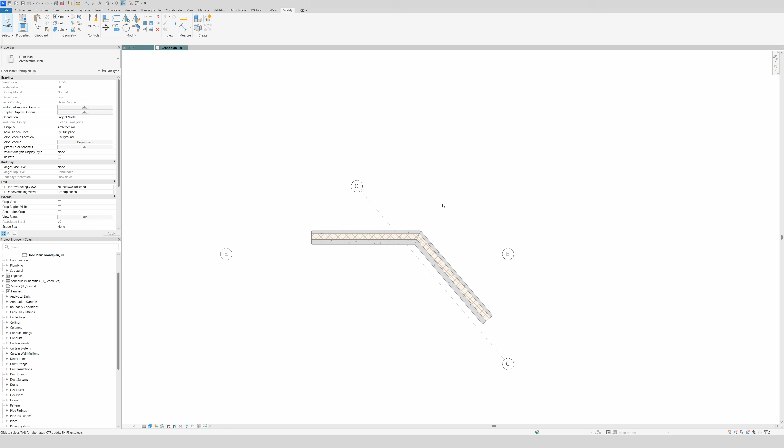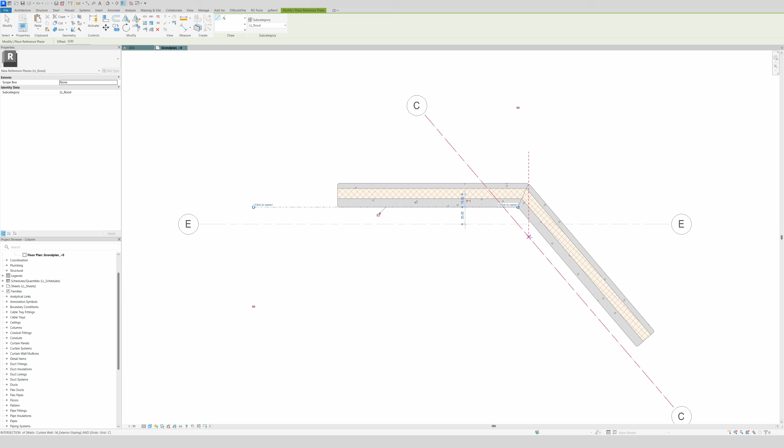Well, how do we get started? As you see here, these are the panels that are at a certain angle. So you want a column from here to here. First thing we're going to do is draw a reference plane, and I will pick the red one, and just draw it from this corner to this one, and from this corner to this one. So now with these reference planes we have our angle that we wish to have in the column.

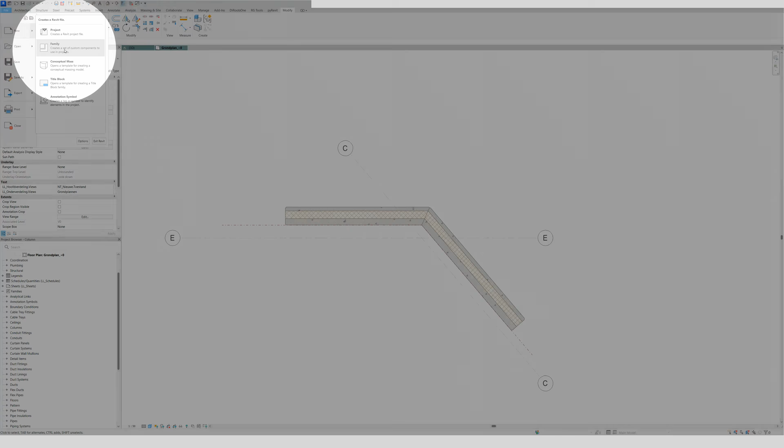The next step is to open a structural column family. So we go to File, then New, then Family, and then we have a metric column, but you don't want that. That's more for the architectural part. You want to scroll down and go for structural column. Select that, open it, and that is what you get.

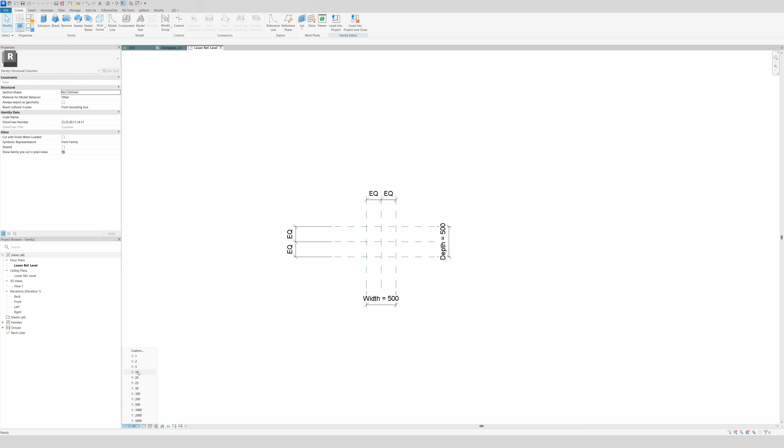Before I begin, I will make some adjustments. I will change the scale to 1:5, and then change the units to centimeter. Shortcut is UN. Click OK, OK, and now we can start.

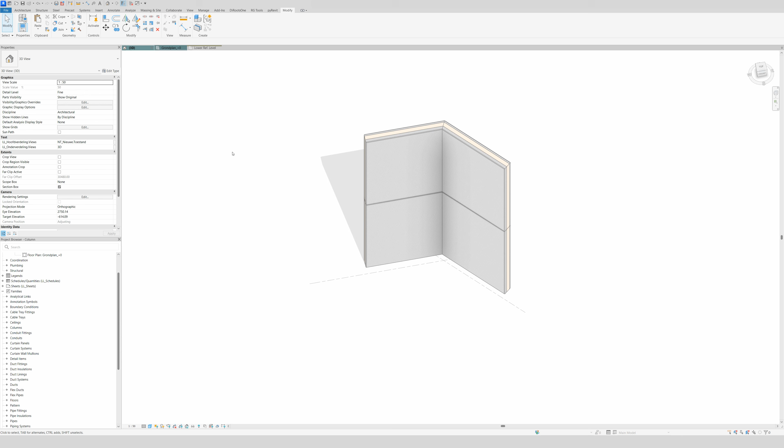So what are we going to do first? Remember that we drew the reference planes. We're going to go to a floor plan again, select the reference plane, then Control Copy, Control C. Then go to the family and paste it, Control V. Voila, and that's our angle that we wish to have in our column.

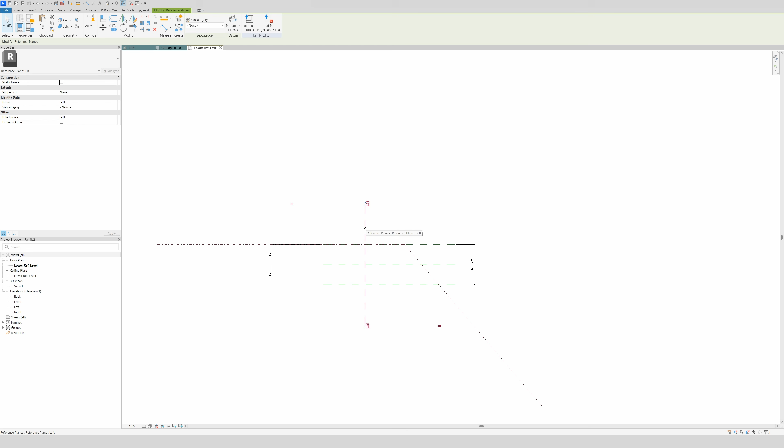We're going to move that to a certain point that I want. I will move it to the intersection. And actually you can delete those ones, just make sure you unpin them first. There we go, and also this one. We have those two others, but I will begin from the one. This I will leave them.

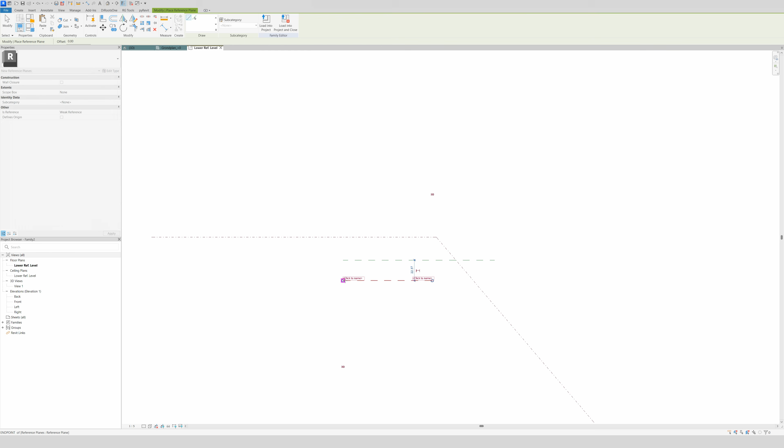Now we're going to create reference planes again, and then add some dimensions, and now we're going to see something that we don't want. Oh, it doesn't. Okay, I will show you in a moment why. This will be the width, and we will set it to width. Going to go reference plane again, and we will see it automatically says it's the same angle.

Then we're going to select it, copy it, and there we have it. I will stretch them out, also for this one and this one. So we have our angle for the columns.

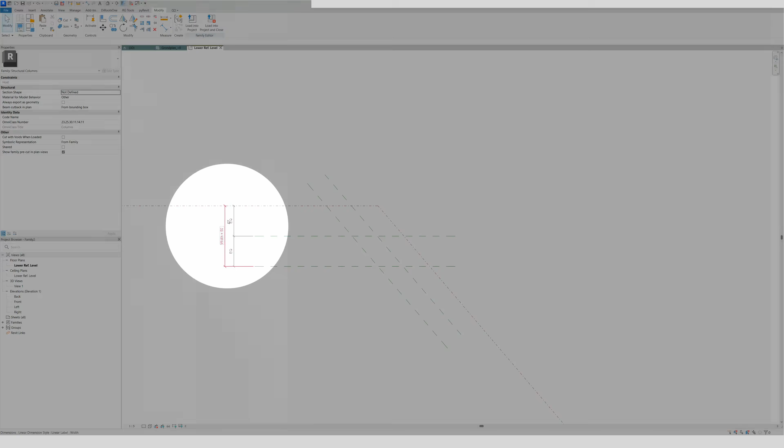We're going to do the same over here. So DI for dimension, I will divide them equally, and also here. Now the next thing I want to do is we're going to use a width of 50.

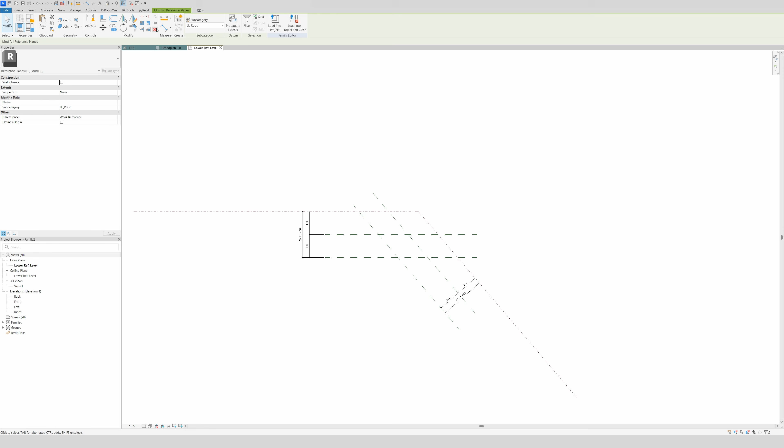The next thing is, because this is our angle that we want, I want to make sure those reference lines won't move again, so I will pin them right here. You can pin them, so they won't move. This way we are sure that we are making a column where the dimensions always move for those reference planes and not this one. So that's an important thing, to pin them.

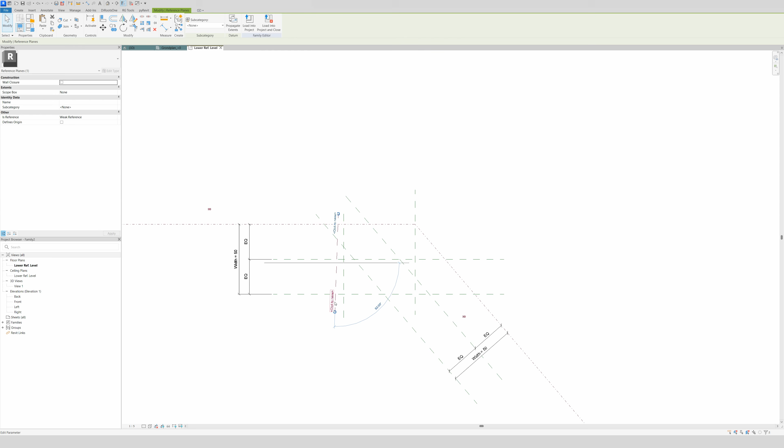The next thing we're going to do is the depth of the column. We're going to draw a reference plane right here, a straight one, and then at the intersection use also a reference plane. Going to delete this one. I'm going to unpin it first and just draw it a bit further away, then unpin it also so we see the intersection.

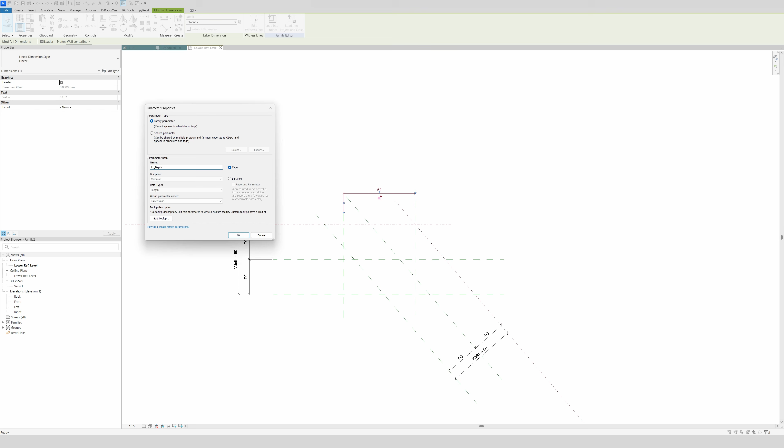Now we're going to use a dimension on it for the depth, and we will make it a depth type parameter. Okay, now we're going to see if it's working. So we have our depth, 40, apply. Okay, it's working, but it's working on the wrong side.

Well, no problem, so we're going to pin that, very important. So here we're going to pin that. And now we're going to use the depth of also again 40, apply, and there it is. It's moving on the right side.

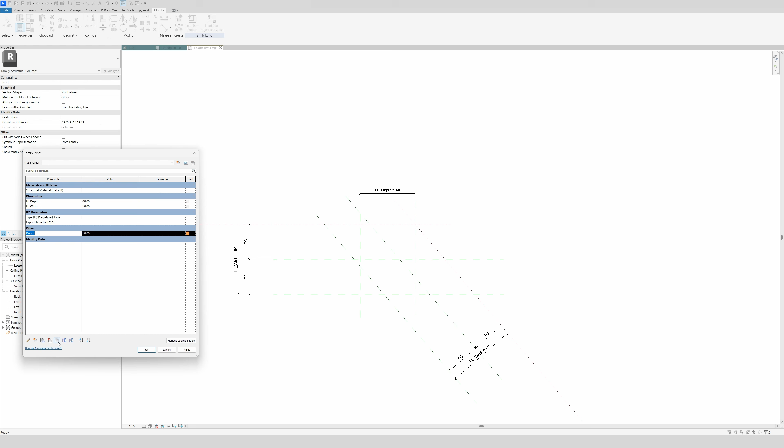Well, for the sake of it, I will use also a parameter for this one and this one, width, and I will delete the other one to make sure we don't have finding problems. Of course, I want to delete them. And that's already a good beginning.

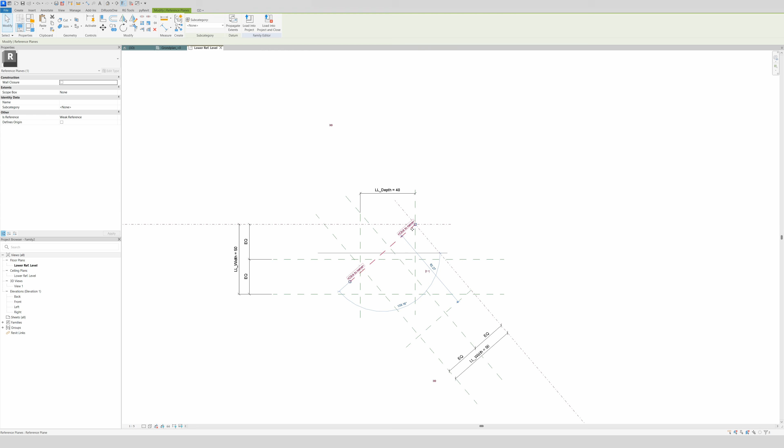Now the depth, we are going to do this for this side also. So again, reference plane, RP, then again you see that's 90 degrees on the angle, so it automatically snaps. Very good. We're going to copy that again to the intersection of it, and we're going to move it a little bit further. Do that first, because if you pin it, you can't move the reference plane.

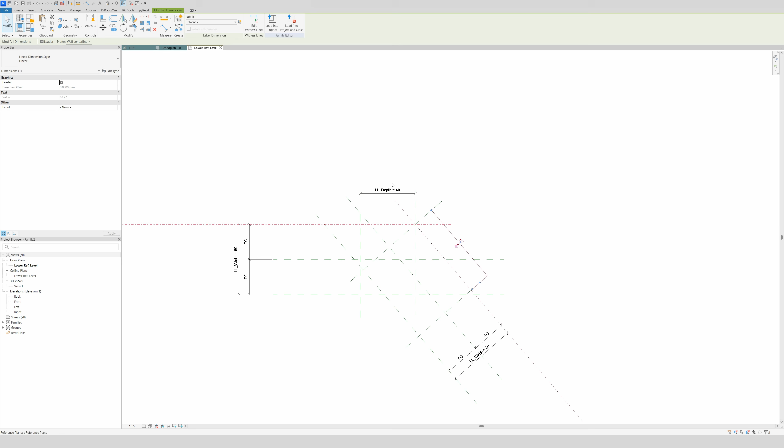So keep that in mind, if you pin it, you can't stretch it. So of course we pinned it because we want to be sure that this one moves. So again, dimension, there we go, and give it the same family, depth 40, and boom, it moves like we want to.

So the next thing is, of course, the column itself, and that's extrusion. So let's get started with extrusion. We go to the create tab, then go to extrusion, and voila.

Now, one important thing that I will remind you guys: we're gonna do big lines, and then of course lock it. Why approach that way? Because then you're sure every line is locked to a reference plane. So we're gonna click here, click here, click here, and we're gonna trim those first.

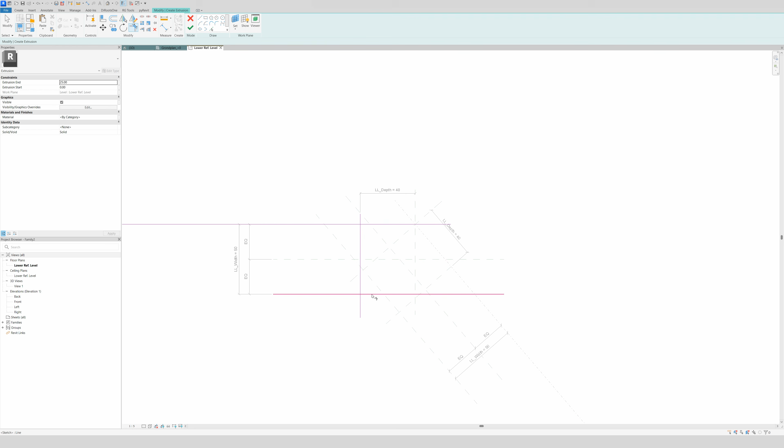Voila, very good. Now again, click on the trim, pick lines, then here, here, and here. So we're gonna trim it. Voila, there we go. Then trim it to here, and here, and of course to here.

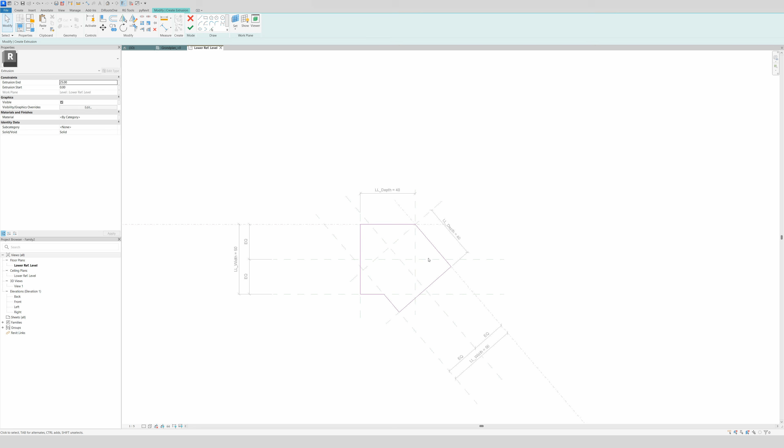And there we have our extrusion. Now we need to constrain our extrusion to the bottom and the height.

So we go to front, then select our extrusion, get with arrow keys to it, it snaps automatically. Click the lock icon, and don't forget for your reference level also, just move it upwards because it's not automatically locked on your reference plane. And then drag it back down. Voila, lock it, and there we go.

We go to 3D, and voila, you see already our corner for the column, so it's already looking pretty good.

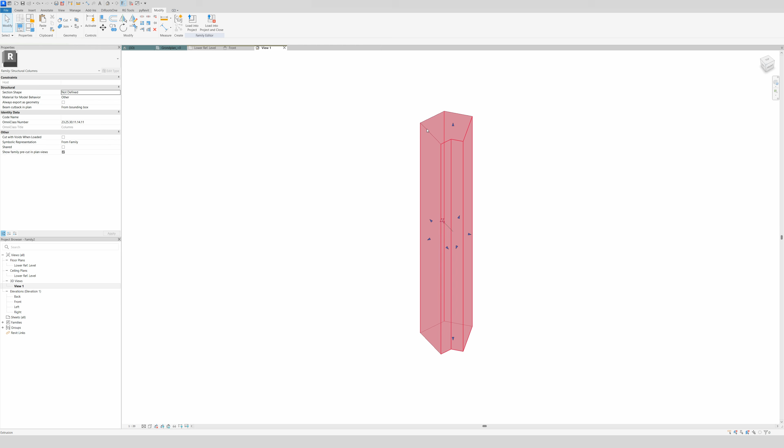Now the next thing that we're going to do is give it a material. So we're gonna select extrusion, then right here we have material, and then make a parameter for it. Material, use type, okay. Voila, there we go.

So we've given our material, and we have our depth and width for the column. Now go to the reference plane, and yeah, that's already looking good.

And the next step is, of course, in the view that you're gonna add some corbels here and some corbels right here for the beams to rest on it.

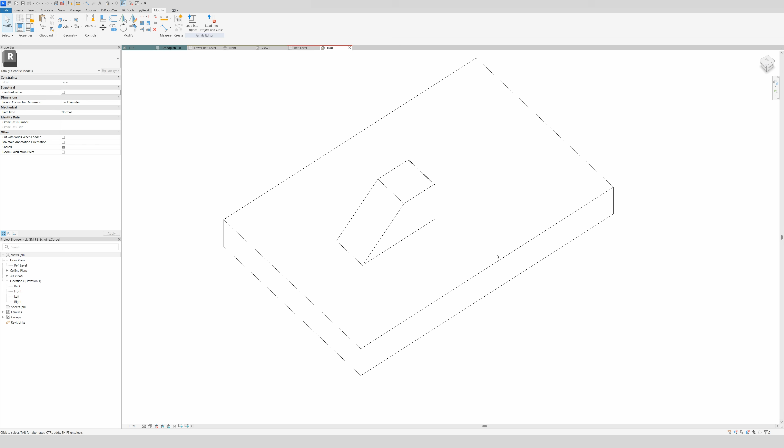So I opened it already, a family for Corbel. It's the face-based generic model for the Corbel, and we're gonna just load it in to the project, and just place it here, and voila, it's in the family, but we're gonna delete it for now.

Now we're gonna open a new view, the left side, because this is the left side. So we go to left, and then it's already in the column, and then we're gonna make a reference plane for the height of the corbel.

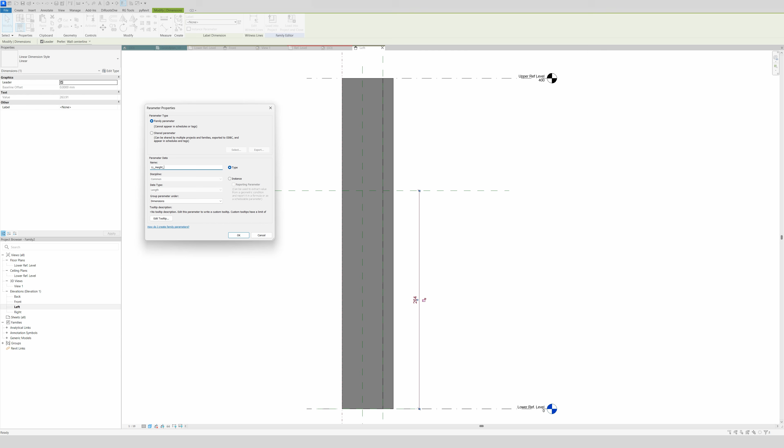And I will use height 1, voila, and then attach it to the reference plane, and we will also use it height 1 type. Okay, voila, and there we go. Gonna check if it works. 250. Yes, it works properly.

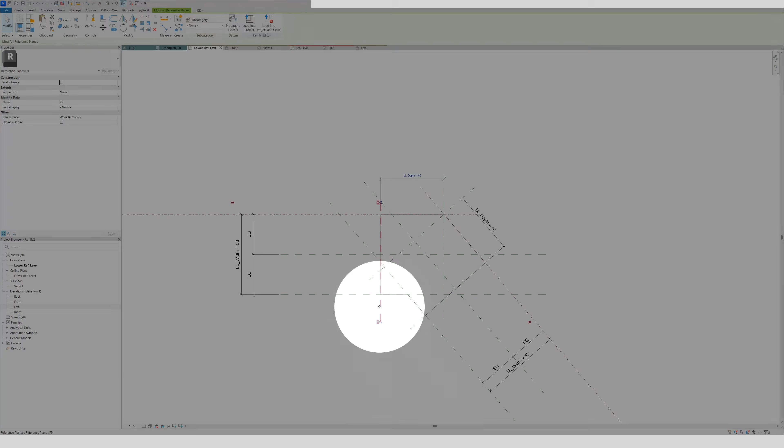Now, remember guys that we gave our reference planes names. That's why, because it's face based, so we need to attach it to this face in order to let it work. So we go to the left side, and then first thing we go to create, and then we're gonna set our work plane.

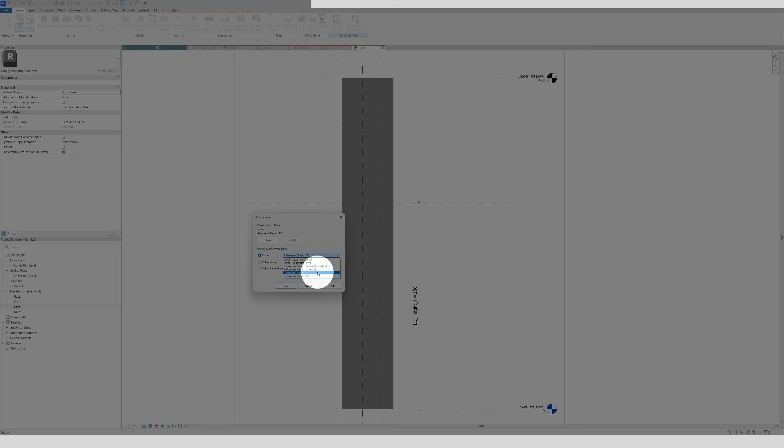And then we're gonna click here again, voila, and then we go for reference plane PP, click it, okay, and now that's referred. So if you see here, we are on the right side, so it's not in a corner or something else.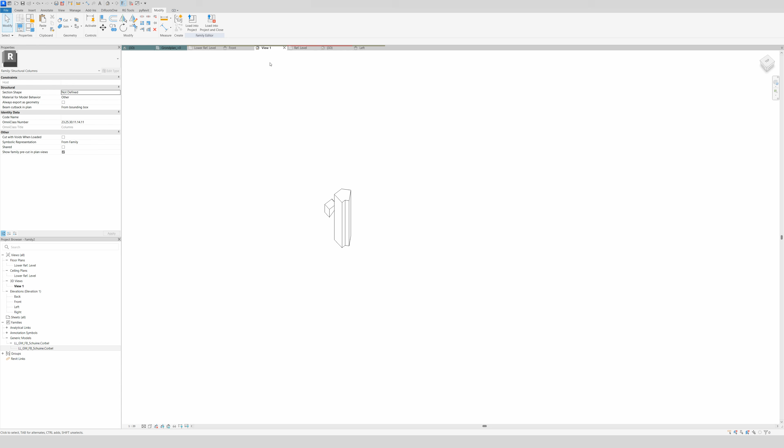Well, no problem. We go to the reference plane, then we're gonna select it, and we're gonna mirror it on the reference plane. So right here, mirror it, voila, and now it's on the right side. Go to the view, and voila, it's facing to the side that we want.

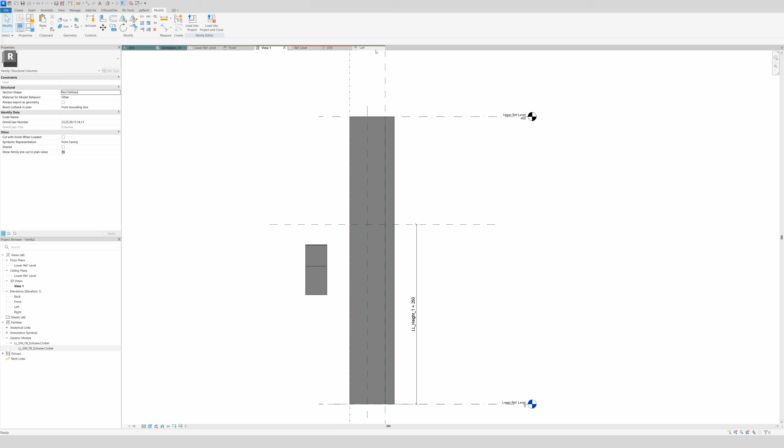Now, first things first, I'm gonna go to the left again, and right here I will adjust the parameters. Why I do that? Because first I need to attach those parameters.

Why? Because they are shared, and if I want it to reference to this height, I can do it, but it will stretch, and that's not what we want. That's not the point of it. So I need to make sure we have these ones first.

I will name it corbel width, yes, okay, corbel width, corbel height, corbel height, height, yes, of course, voila. Okay, and then I don't know how it is in English.

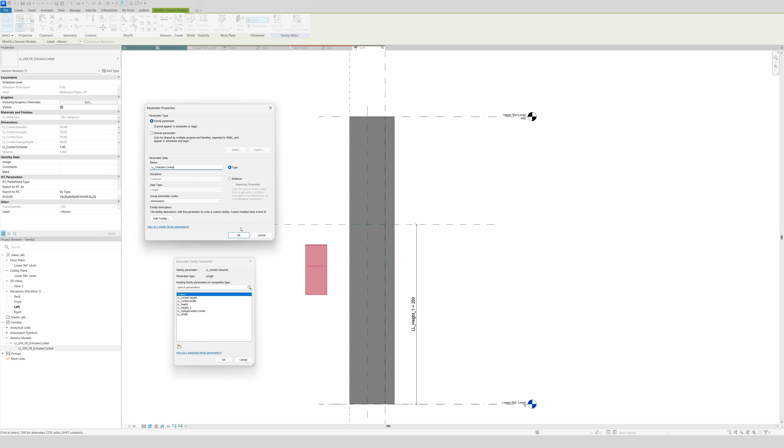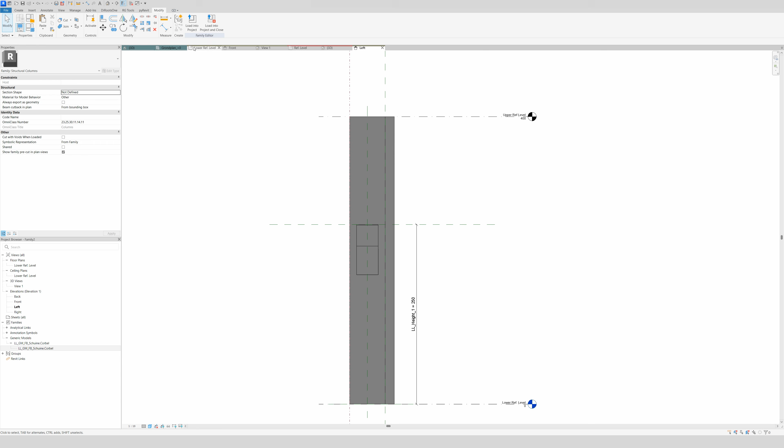Voila, there we go. And then of course the chamfer corbel, voila, click OK, and now that's what we want, because now you're gonna see why. So we're gonna align it to the reference plane for the height, and boom, it moves as one object, and that's what we want. That's why you need to make sure you make the parameters. And now we're gonna move it to the center right here, voila, and of course don't forget to lock it. And right here you see in the view that it's not the width that we want, but I will show you this in the next step.

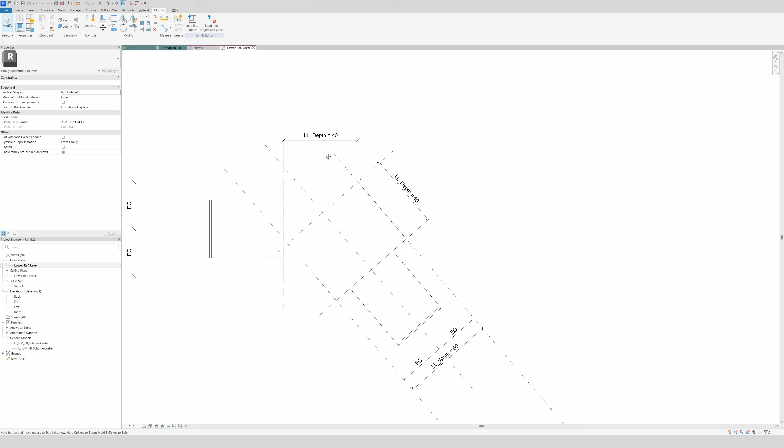As you see here, I added another corbel, and now before we change the width for the corbel, I will chamfer the column itself, so it's more looking realistic. Then we go to floor plan, and now we're gonna add chamfers, and we will create that with void extrusions.

So again, we're gonna click pick lines and lock it, then select these one, and these one. Then I will split it, drag it to here, and then just trim it.

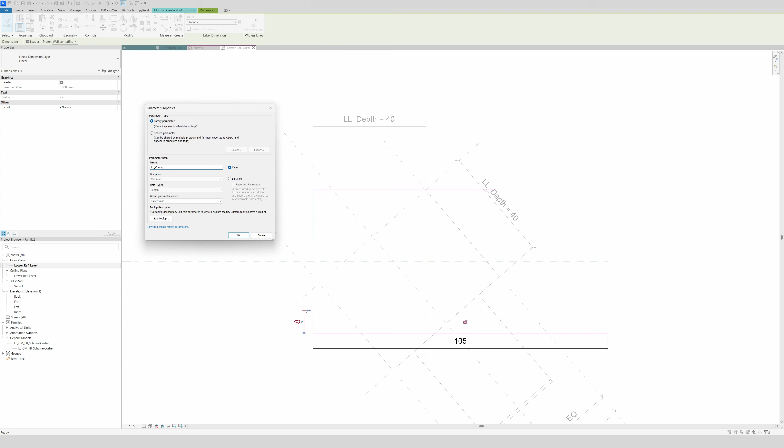Voila. Then I'm gonna add some dimensions right here to here. And from here to here. And I will say make it a parameter. And I will add dimensions to here and this to here. Select the dimensions and of course chamfer.

Voila, voila, voila. Then draw a line right there, and I will move this a little bit up so I can see more, or you can use thick lines, of course. Now we're gonna do it the same for this side and this side.

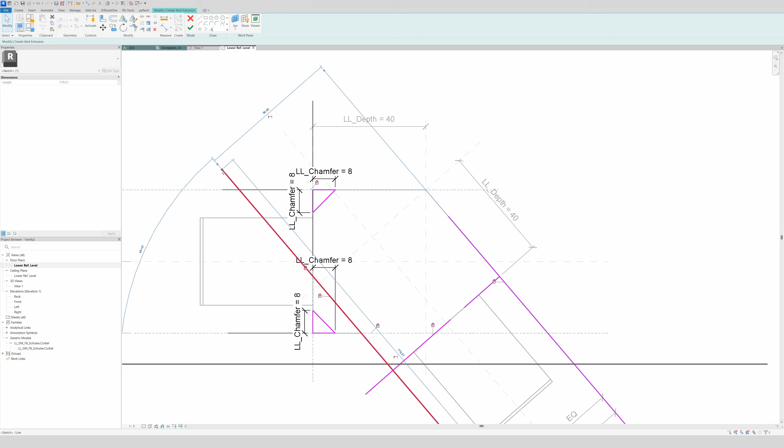Split line, draw it like this. Same for this one and same for this one. Then trim it, add dimensions. Same for those.

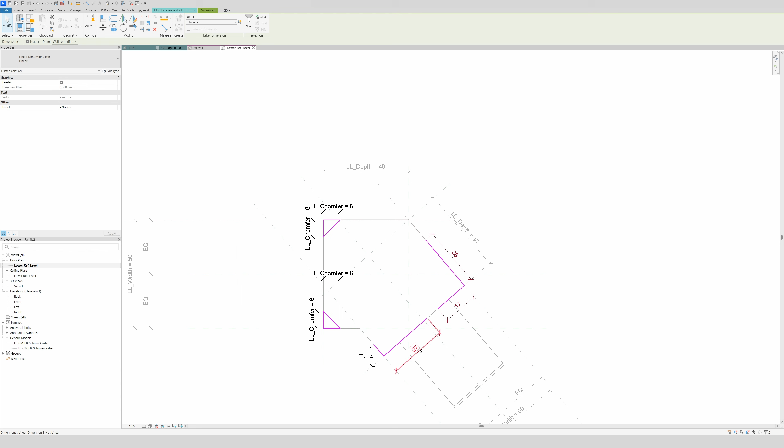Then select all the dimensions and give them a parameter for chamfer. Then again connect them to each other. There we go. Click on finish and we have our voids right here.

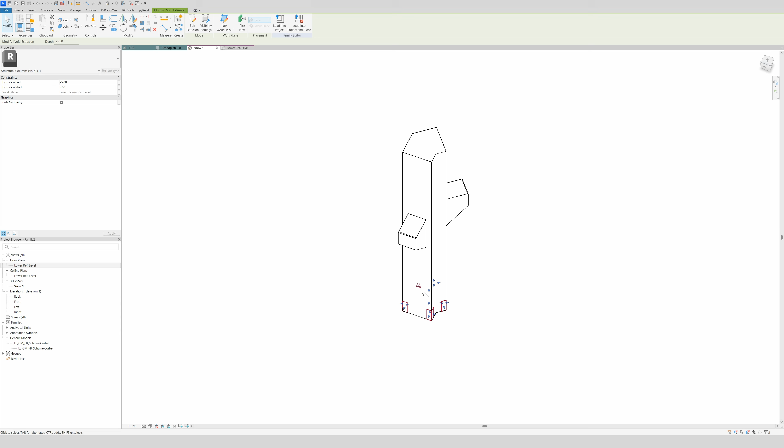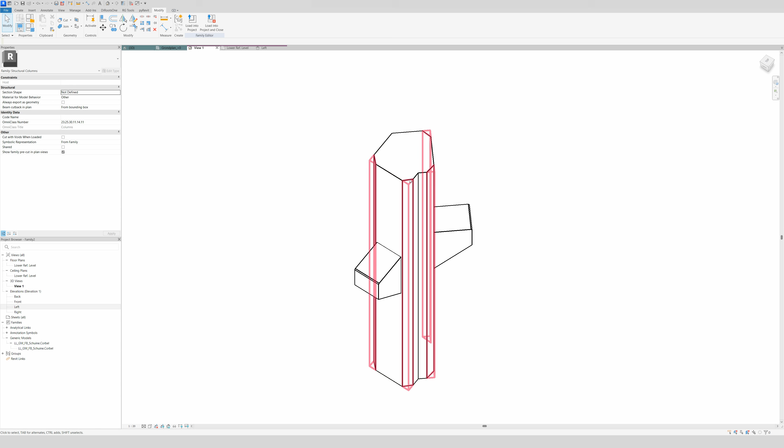We go to the left side and we're gonna constrain it like this, and of course constrain the base. And in 3D we have our chamfer looking not really great now, but I will change it. This is a lot better.

Now for the corbel width, we want that it just fits between the chamfers. So what do I mean by that? The corbel needs to fit by this line to this line. So we're gonna adjust the parameter for the corbel width.

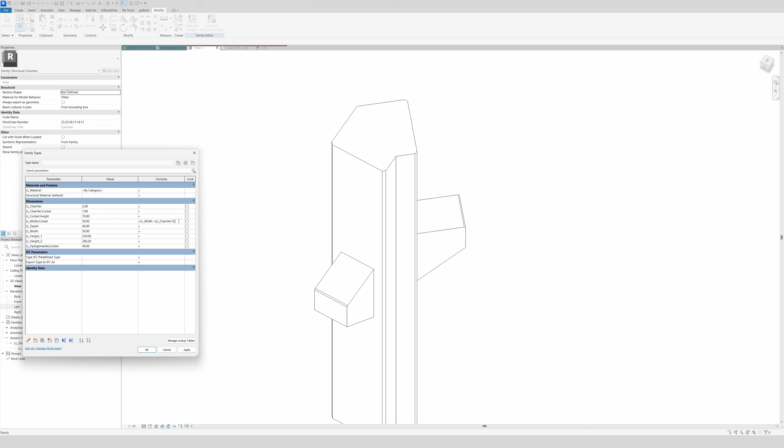So we get the width, copied it with this one, and then we're gonna copy chamfer and we will do it negative 2 times chamfer 2, and voila. There we go. And normally it needs to fit perfectly in between the chamfers, and yes, that's what we want.

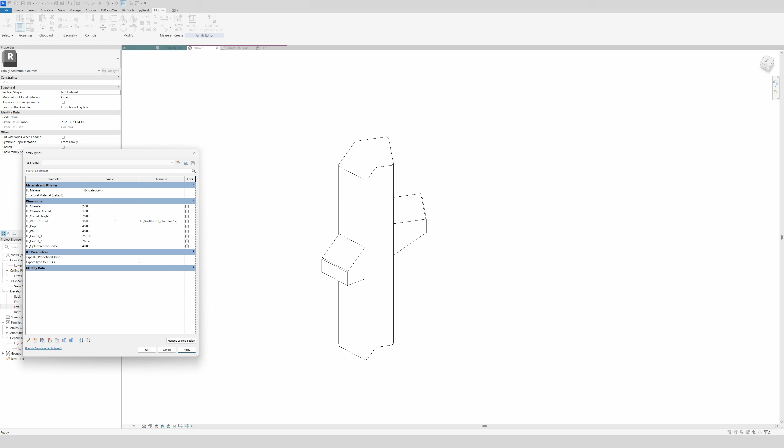Now we're gonna adjust the width, of course, width to 40. Voila, and this is looking so much better. And it seems already nice. So actually we have our family for the corbels.

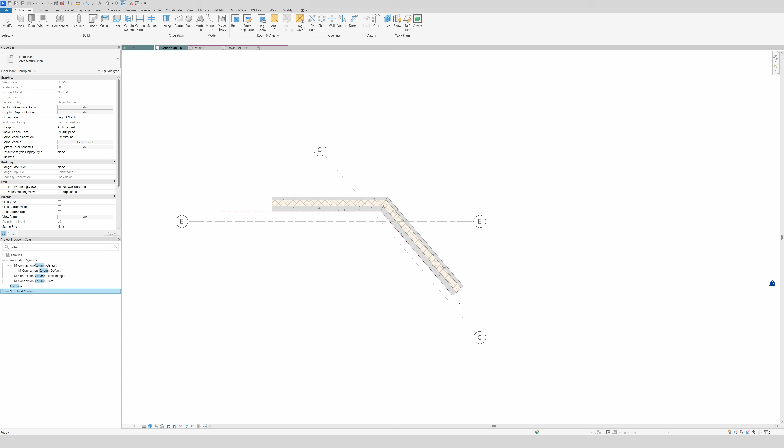The next thing we only need to do is of course import it into our project. We're gonna do that. Voila. Oh, I will overwrite the family because I already had one. So I will first delete them, structural columns, and we will delete this one and delete this one. And we're gonna load it in once again, so we have it already on our mouse. And voila, there we go.

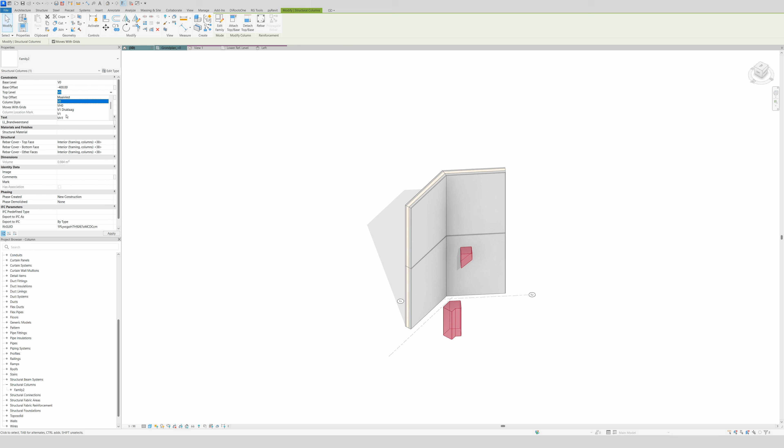We go to the view and 3D, this 3D mode, of course, and we will change it to there. And of course we need to change some things. We want to do it to 0, and yeah, of course we need to do it to level 2 and then to 0. Voila, this is what we want.

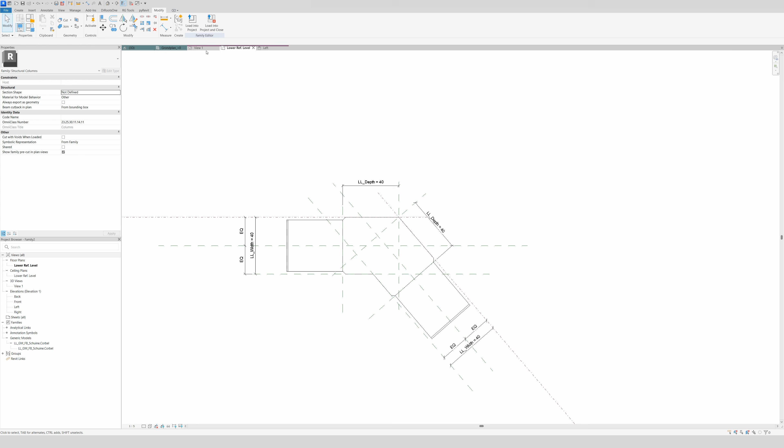And now we can adjust the material, and I will do it like this. Apply. Oh, and voila. Oh, I forgot this corbel, so no problem. I will go to the view, edit it, and of course material, yes, load it back in, override existing version, and there we go. It has the same material.

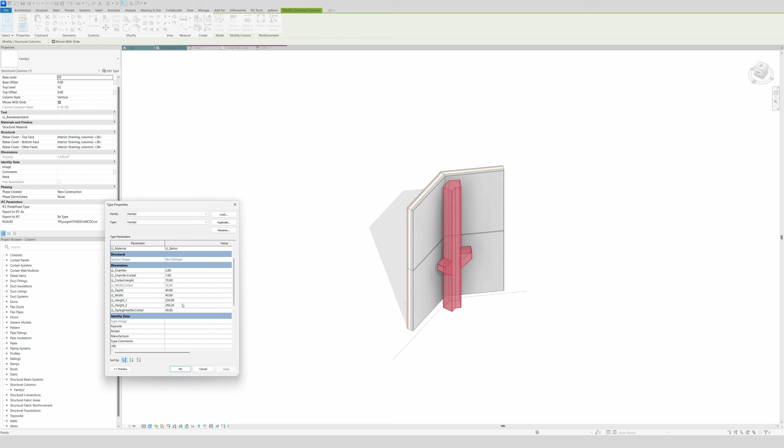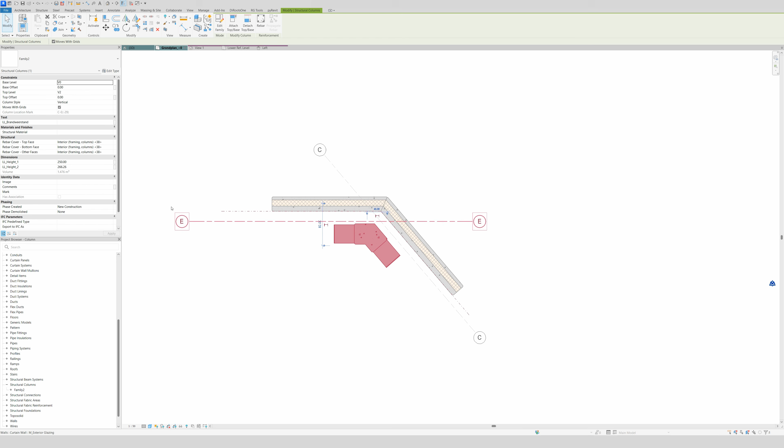And then we can change the height of the corbel. Normally I do it as an instance parameter and not a type, because it can differ by column. And I will again go to this family and make it instance, apply, load it back in, override existing version, and there we go.

So we're gonna, oh, this 3D mode. So we're gonna adjust the heights to maybe 420, 520, and voila. Now I see I forgot it on purpose, because you need to make sure it's connected to the reference line.

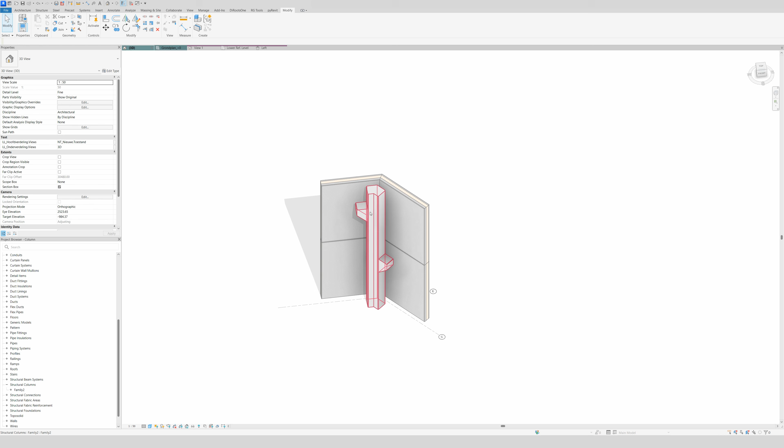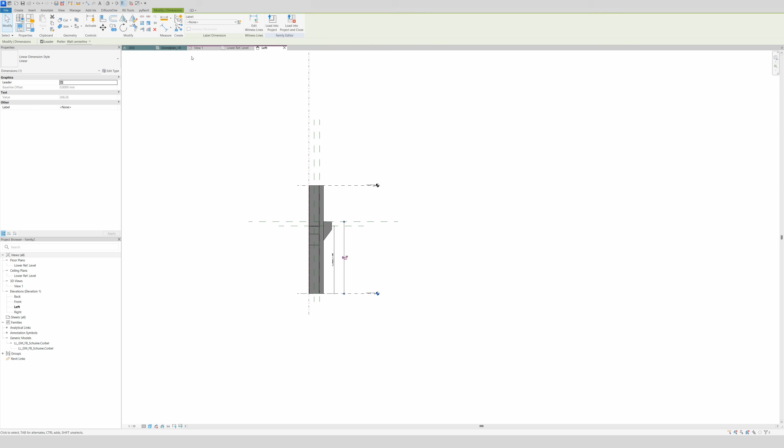So you go to the left again, and I see here that this isn't connected. So I will see if there is a dimension. No. And this will be 2. Voila. And now it will work.

Again, load it in, override the existing version, and you see it disappears. So that means, in the other view, that it works. So we have our fully parametric corner column.

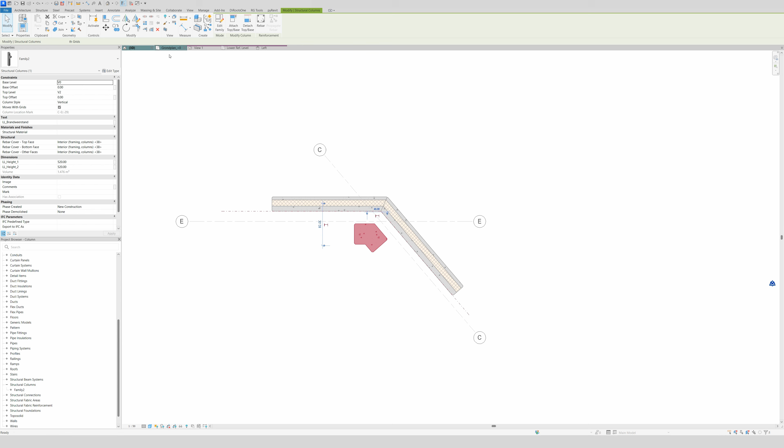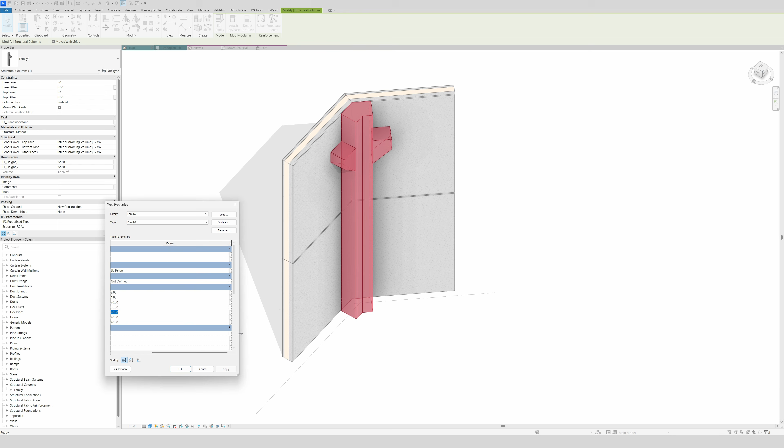I will move it to the right place, of course. I will make sure I have the corner, yes, and right here. Voila, looking pretty good. Now go to the 3D, and then we can just start to modify it by using, I will make it like this by 50, and right here 50. Voila, and that's how the column is bigger.

The chamfer I can set to 1, of course. And the height I can change it to 60. And maybe if you want to go crazy, you can go by 30-30 and make the corbel, of course, 70 again, and 30. Voila.

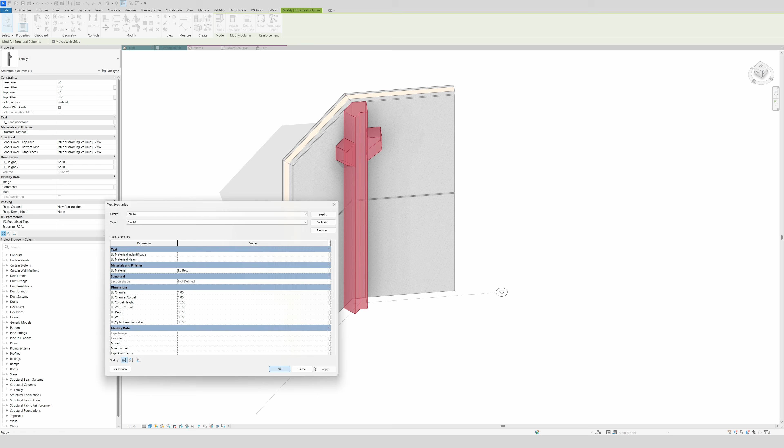And there we go. So I hope you guys enjoyed the video and learned a lot from it, so you can make your own column in a corner.